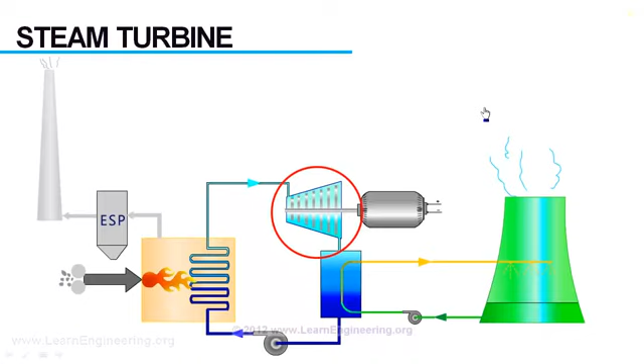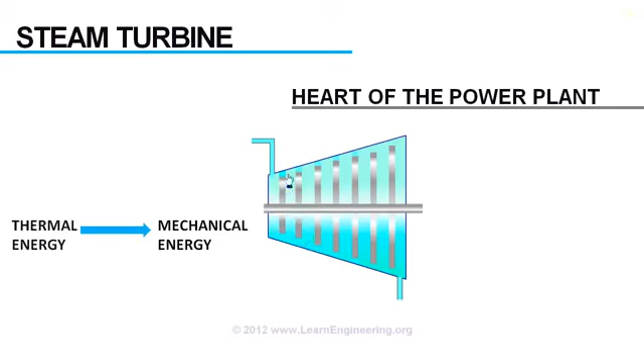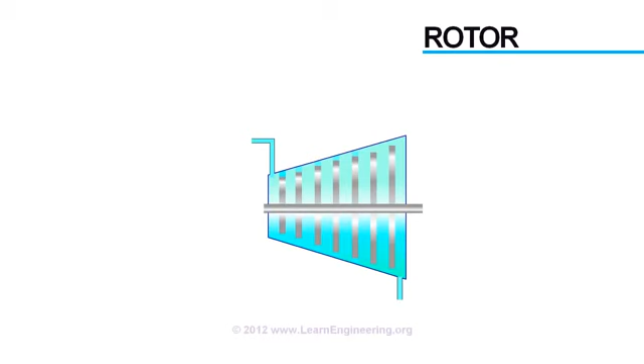In today's video, we will understand the working principle behind a steam turbine. Steam turbines are considered to be the heart of the power plant, because this is the device which converts thermal energy from fluid to mechanical energy, more precisely as rotational energy of these rotors. So a series of such rotors, which eventually absorb the fluid energy by virtue of its rotation, are the most vital component of a steam turbine. So, let's have a close look at one of such rotor sets, in order to understand more about its working.

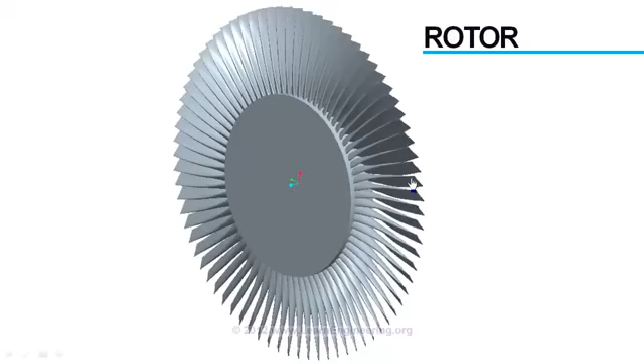Here it is. This is one rotor set, and you can see there are a series of blades which are connected to the hub of the rotor. And in different orientations it will look like this. Or, like this. If you take a close look at one of such blades, you can observe one thing. This blade is a collection of different airfoil cross-sections set together. Airfoil cross-sections which vary in size and shape from bottom to top.

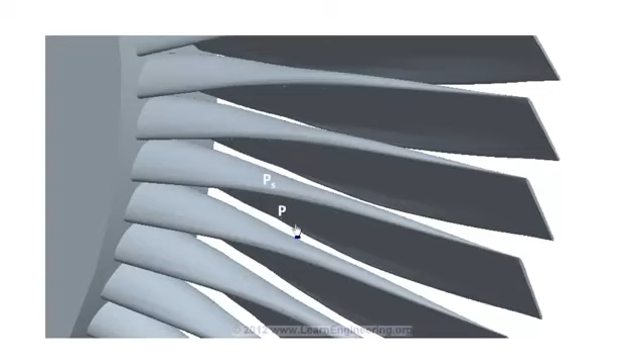When high-energy steam at inlet, the steam with high pressure and temperature, flows over such a blade, it will induce a pressure above and below the blade. And thanks to the special shape of the blade, the pressure above will always be less than the pressure below. So, there will be a resultant net force acting in an upward direction. This force will make the blade rotate, in this manner. As the blade rotates, it obviously absorbs some energy from the fluid, so fluid at exit will have less energy compared to inlet. In the coming session we will see how we can predict the energy transfer in the fluid.

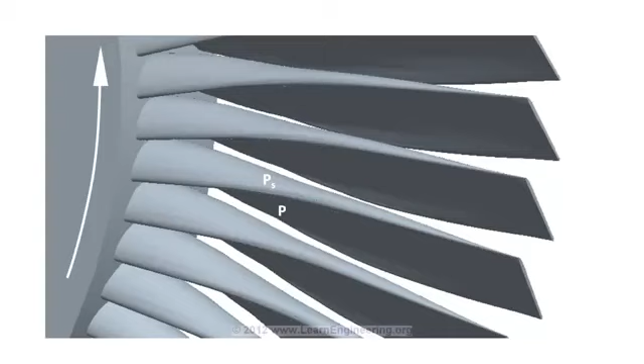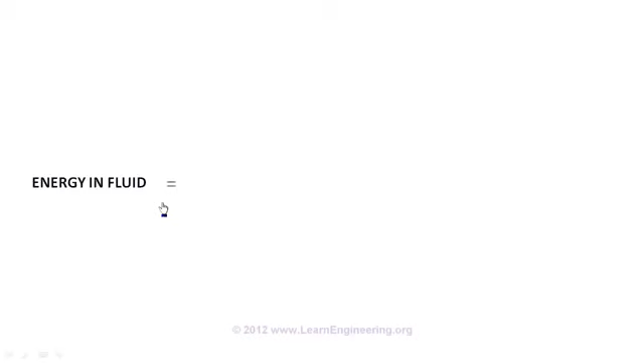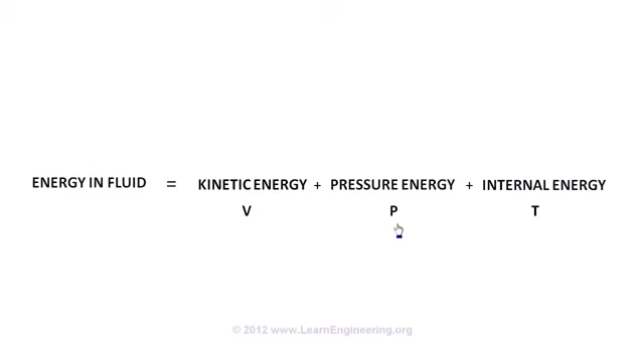But before moving to that, we will have a brief look at energy associated with a flowing fluid. There can be three components of energy for a fluid. First, due to its velocity, the kinetic energy part. Second, by virtue of its pressure, the pressure energy. Third component, by virtue of its temperature, the internal energy. The last two components of energy, the pressure and internal energy parts, can be combinedly called enthalpy. If a fluid has a high enthalpy value, it obviously means it has high pressure and temperature.

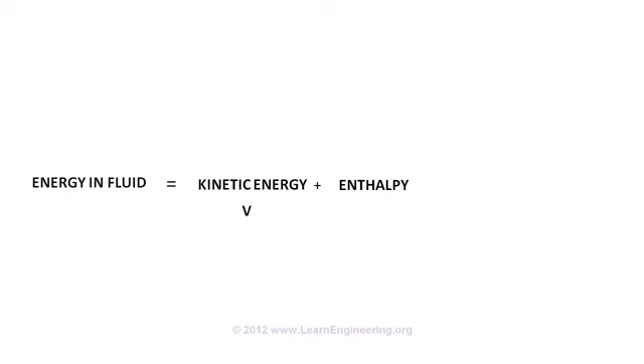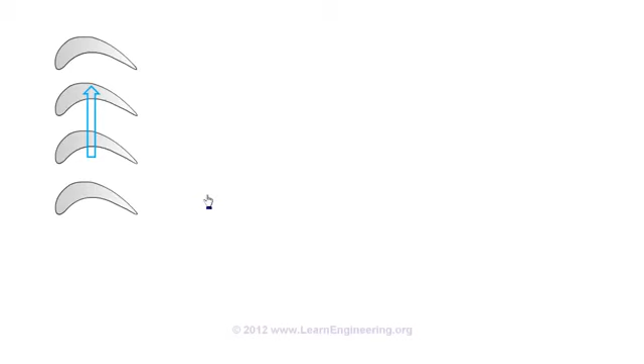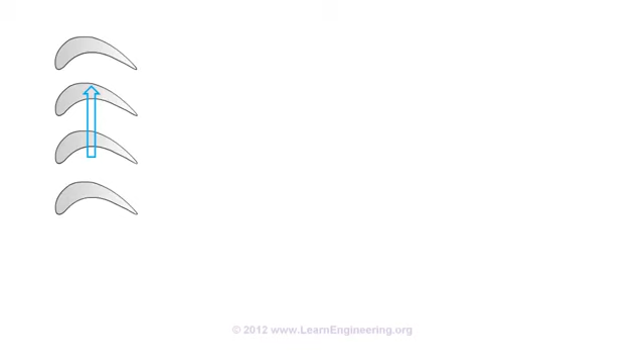Now we will see exactly how a steam turbine is absorbing energy from steam. This is the rotor cross-section of a blade, at a particular length. As the steam passes over, the blade will rotate in this direction. And this will result in energy loss to the fluid. For a typical steam turbine, both kinetic energy and enthalpy come down. So if you plot velocity of steam from inlet to outlet, it will be like this. As kinetic energy decreases, velocity decreases. Similarly, enthalpy also decreases, like this.

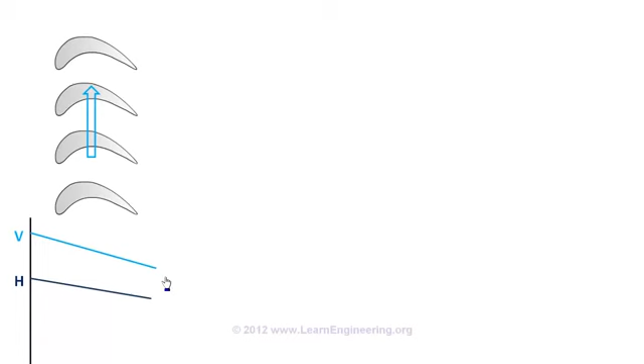Now the next step is to pass this steam to the next stage of rotors. But if you directly pass steam to another set of rotors, it won't absorb much energy, because here the velocity of steam is already very low. So before passing the steam to the next rotor, you should increase the velocity first. For that, we will use something called a nozzle, a stationary device which is attached to the casing of the turbine. They are also called stators.

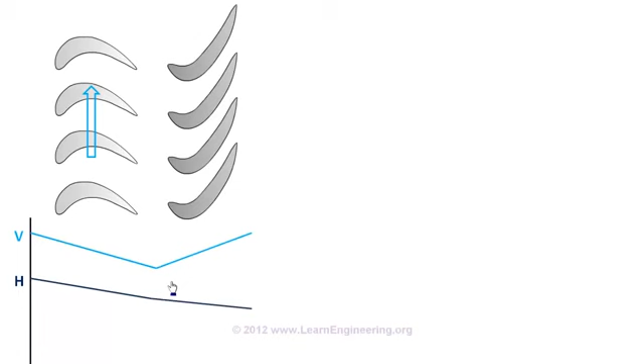Stators are also a set of blades, but these blades are stationary. They won't take part in the energy transfer. What they do is simply transform energy from one form to another. Or more precisely, they transform the enthalpy energy into kinetic energy. You can see the cross-section area of the nozzle decreases with flow, so due to its special shape the velocity increases. But at the same time enthalpy decreases. If you sum the change in enthalpy and kinetic energy, there won't be any change.

Now we have increased the velocity of the fluid, so we can put the next set of rotors. Again stator. And again rotor. So in a steam turbine there will be alternating sets of such rotors and stators. Rotors which are moving, attached to the hub. Stators which are stationary, attached to the casing of the turbine.

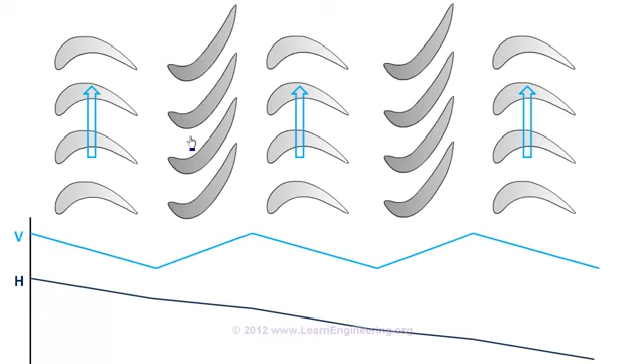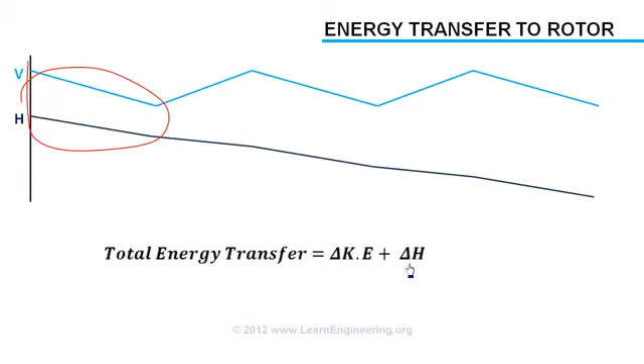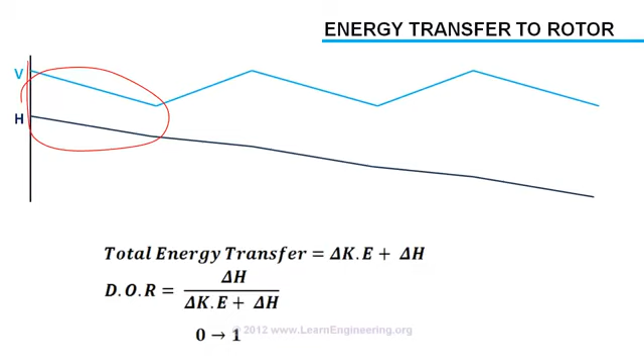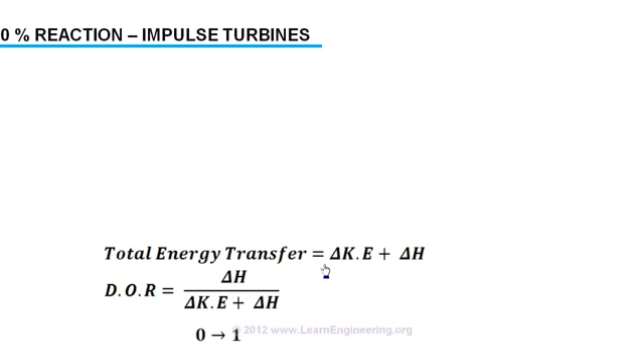A practical steam turbine will be a compromise of these two cases. People usually use a 50% reaction turbine, known as the Parsons turbine.